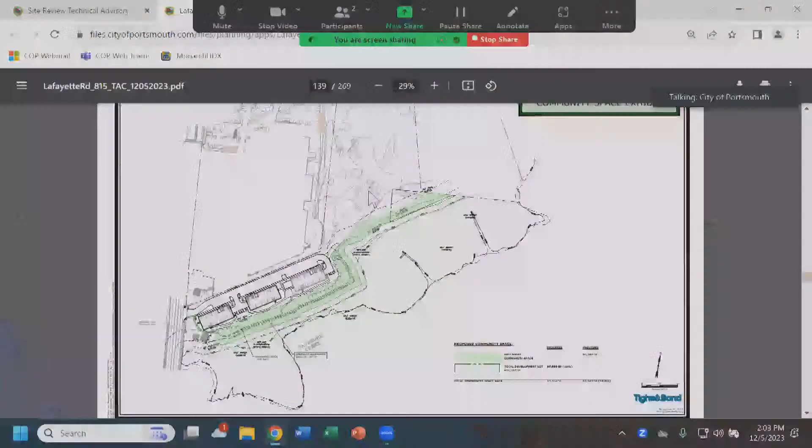Any questions from TAC members? Comments? You said they're both owned by the same person? Yes. Can they do that? Yep. Okay.

I appreciate the community space addition. I don't have any questions about it. It's nice to see it going all the way across the property, even if the trail doesn't go the whole way, but the park space will be appreciated in the future. Maybe some connections can be made, but it's a good plan.

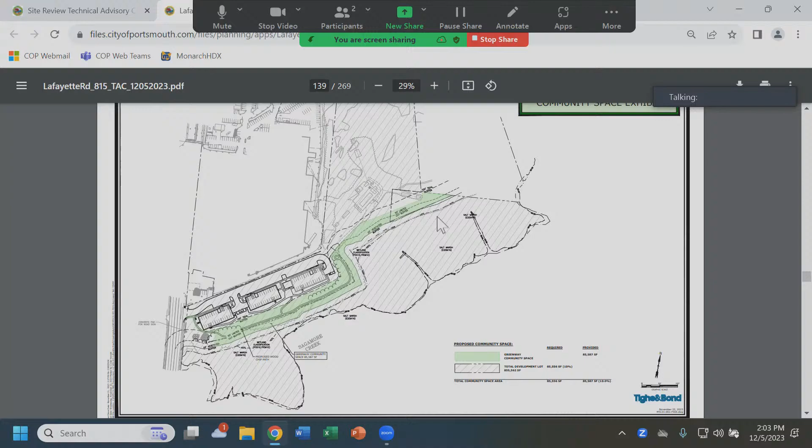No additional comments. We'll open it up for any public comment on this application, if anyone would like to speak to it. Seeing no one present or on Zoom, we'll close the public comment portion and open it back up to TAC for further discussion or motion.

I have one comment on note 13 under the site notes for the emergency gate. It says it'll be equipped with a Knox box. Can we just have that equipped with a Knox padlock? Yes, absolutely.

That's not going to be an electric gate, right? Just to confirm. Yeah, correct. Anything else?

I'll make a motion to move this on to the planning board, with the stipulation added that was in the comments delivered to the applicant yesterday. I'll second. All right, we got a motion and a second. Any further discussion? All in favor? Aye. Any opposed? Motion carries. Thanks. Thank you.

I don't know how much of a presentation you want. I think we did a workshop, but this is the first TAC meeting, so we can go through the plans if you'd like, or just go to the comments. It's up to you. I think if you start with addressing the comments that were sent out, and then we have another further discussion. Okay.

We have a letter and attached slightly revised plans to address the comments we received from the committee about the plan. I'll go through the comments. The first comment was: please provide documentation that the water line easement crossing over parcel 209/87 has been assigned to the city.

We previously provided some information. I don't know if that was determinative, but the third page of the submission is the current deed. The property is currently owned by the James J. Murphy and Carla J. Murphy Revocable Trust, and their deed is subject to a 10-foot water easement as shown on plan dated July 26, 1984, and recorded as Plan C-12849.

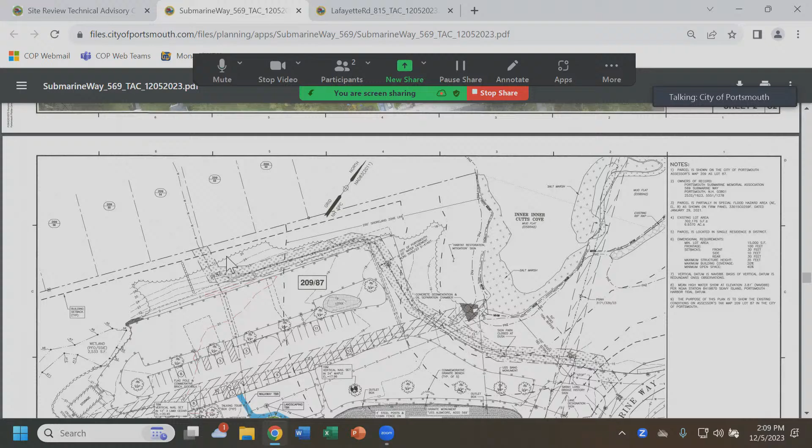So it's a question of legality. The usual comment had to do with the water easement going to Albacore, but the comment had to do with getting it assigned to the city. Currently that lot is owned by James J. Murphy and Carla J. Murphy. The Portsmouth Submarine Memorial Association, if you could link them to the original grantor of the easement, would be happy to grant the city whatever rights they have in that easement.

I think this is a matter for further legal review, but the easement isn't described as to a particular party, it just says a 10-foot easement. If the city put the pipe in, one might assume they'd have the right to keep the pipe. I don't know, that's a legal question we're not going to solve here, but we're certainly willing to work with the city. So we'll keep that comment in play until you get an okay on it.

Correct, I'm not sure that they can compel the current owners to - no, but they should be able to assign their easement rights over to another entity for the same purpose, list the city, I would think, if they have to. Yep, so that's the submission for number one.

Next comment was to increase the number of handicap spaces to account for the unmarked parking lot. On that same sheet 4, in the unmarked parking area, we identified 26 possible spaces on the northwest side, and another 26 possible spaces across the aisle, adding note 10 for ADA parking space requirement. If you add all those spaces that could be striped, you'd come up with 119, requiring 5 ADA spaces. So the ADA spaces in front of the addition, where the sidewalk is being provided at the pavement edge, was revised to show 5 ADA spaces.

What keeps the cars from rolling onto the sidewalk? We're showing bollard posts at the head of each parking space so the cars don't impede the sidewalk, because the sidewalk has to be flush for those different spaces to be accessible. So if you could show bollards at the head of all those spaces, installed with the proper signage, that would solve the issue. As long as it doesn't block the route - right, it shouldn't block the route, because if it's in the middle of the spot, that wouldn't block the route.

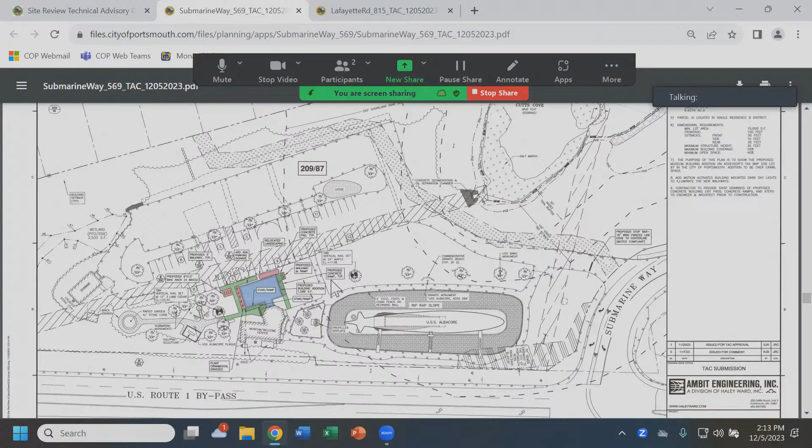Regarding the previously received comments, I followed up with a question about that. We had a TAC workshop, so I kind of repeated what I heard there. I don't know if that was the intent of the comment, or if there's another question that came up we can answer. It's more for easy review. I mean, you've made changes based on what we said, so I would assume you wrote those down. If those could come back in a list with noted changes, so we can easily see what alterations were done, that would help.

So the things talked about was the source of heat. Propane forced hot air was the response. The force main from the basin needed to be connected, and we've added that connection.

On the grading and drainage plan, a note was made to provide flood-resistant floor construction if it's a crawl space, and we made the architect aware of that. A question was asked about the flood zone elevation, which we added to the flood zone note. The water easement issue came up, and we did provide some information to planning about that.

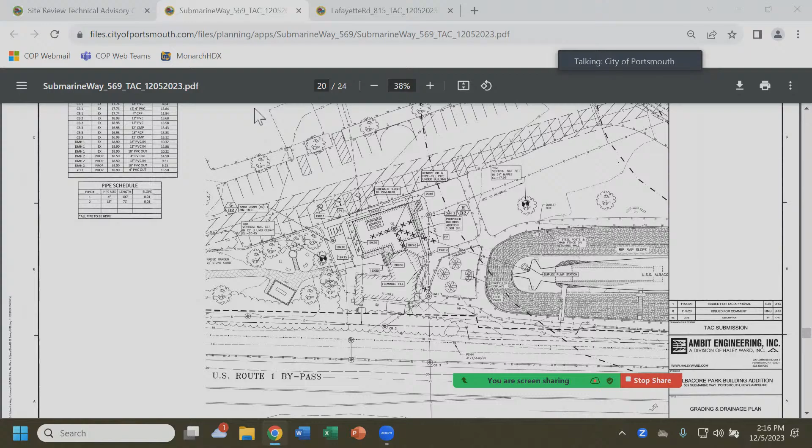The plans also show a proposed yard drain. If you look at sheet C6, the last sheet, the grading and drainage plan, I did mention at the workshop that we had not yet done a complete grading work, so this plan shows the proposed spot grades. We decided to add a yard drain on the west side of the building to ensure that area doesn't become soggy, and we show a drain line that would go around and connect to the proposed drain manhole.

Additionally, there's an existing sump pump that drains into DMH1 on the east side of the building. Upon further review of the site drainage, there were a lot of changes made when the bypass was reconstructed. CB2 has been removed, and the pipe into drain manhole 1 from the south is capped, so we believe drain manhole 1 serves no purpose anymore. We noted it to remain in place but be abandoned. The pipe that goes from drain manhole 1 to catch basin 1, which runs under the existing building, will be filled with flowable fill, and in the area where the addition is proposed, it will be removed along with that catch basin.

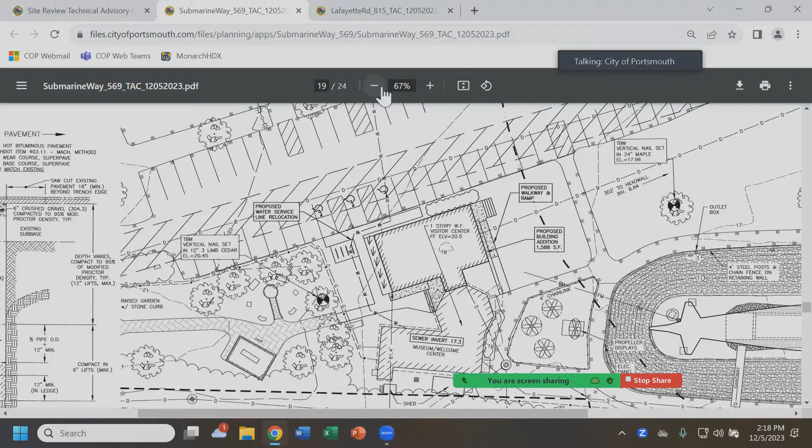Additionally, there was a plan that had a location of the lighting conduit that feeds the parking lot lighting. So we added that approximate location to sheet C5 and put notes on both plans that the contractor is to determine the exact location and report it to the team before construction, so we can make appropriate changes since there's a conflict with the proposed water service. I think that covers the changes. Hope that answers the questions, and hopefully we can move forward to the planning board.

All right, thank you, John. Any other comments or questions from TAC members?

So the lighting plan will be included with the planning board submission? Yes. Do you know what it entails? Yes, I think we have a note. Basically, there's going to be building-mounted lighting to light the walkways. Everything else, the parking lot already has fixtures, so there won't be other lights. So I think it would be fairly contained to the area immediately adjacent to the building and not impact the neighborhood. But we wanted the architect to tell us the appropriate fixture. Yeah, so we need that spec, and then we can complete the lighting plan. We want the fixture to match the architectural style of the building. Yep, and they'll be dark-sky friendly. Yes. Okay.